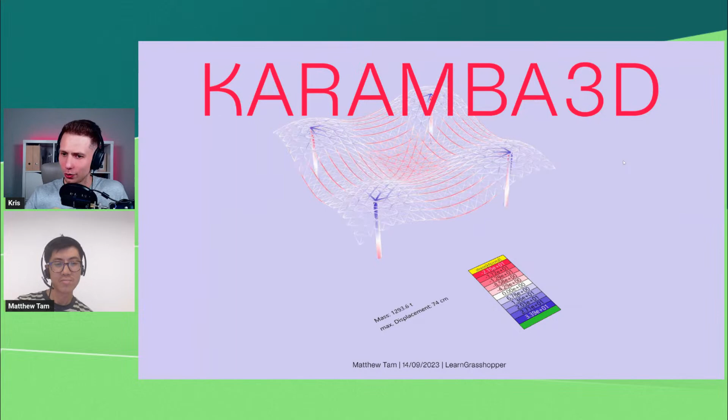Okay, we can see your screen now. Matthew, the floor is yours. I will follow the questions. So let's talk about Karamba 3D. Thank you. So I'll just start.

So basically today I'm going to be talking about Karamba3D. It was founded by Clemens around 10 years ago, and I've listed the current team members. We're approximately 7 to 8 people working half-time to full-time on the development of Karamba at different levels, from full stack and backend to a lot of the examples and learning materials that we share on our website.

Karamba3D has been developed as a collaboration between Bollinger and Grohmann, and it started as a research project at the Universität für angewandte Kunst Wien, the University of Applied Arts, Vienna, approximately 12 years ago, where the initial foundations were implemented. As Kris has already mentioned, my name is Matthew, and I'm a computational designer, also a trainer. My background is in architecture, but I've been in practice at the office of Bollinger and Grohmann for nearly 10 years.

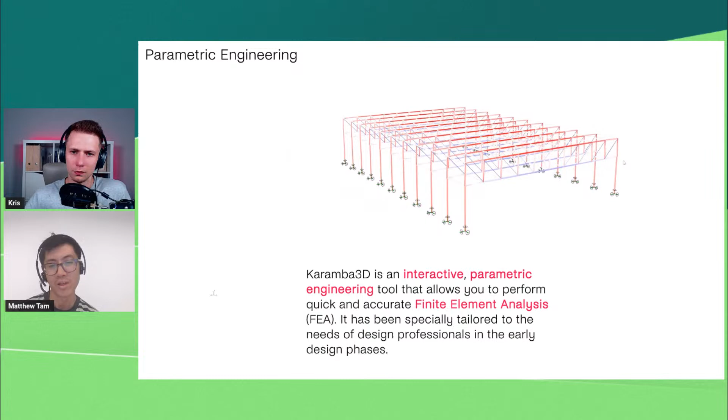So what is Karamba3D? Some of you have looked at it, some of you haven't. Basically, Karamba3D allows you to do what we call parametric engineering in the interface of Grasshopper. As you're aware, this is the platform for learning Grasshopper, so I'm not going to go too much into Grasshopper, but it allows you to do FEA directly in the interface of Grasshopper, allowing you to quickly analyze and get interactive results on your structures. So basically, you have your algorithm of calculation, and you can do everything in Grasshopper. So you don't need an external finite element analysis.

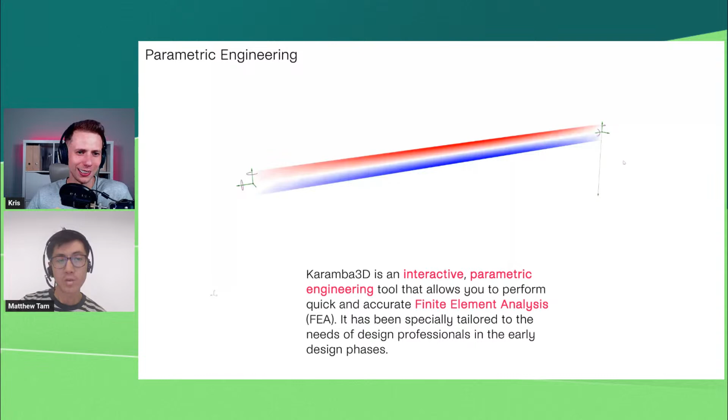I remember when I first used Karamba, maybe 5-6 years ago, it was only beam elements, but I think it was expanded since then, right? Yeah, so you can do beams and shells at the moment, and also trusses and membranes in Karamba. Good to see that you are also developing.

At the start, you showed the slide with the people who work on Karamba. How many of you are now at Karamba? I think we're 7 to 8 people, mostly half time. There are a couple who are a bit more, mostly based in Vienna, but also a couple remotely around the world. Great. So a small team.

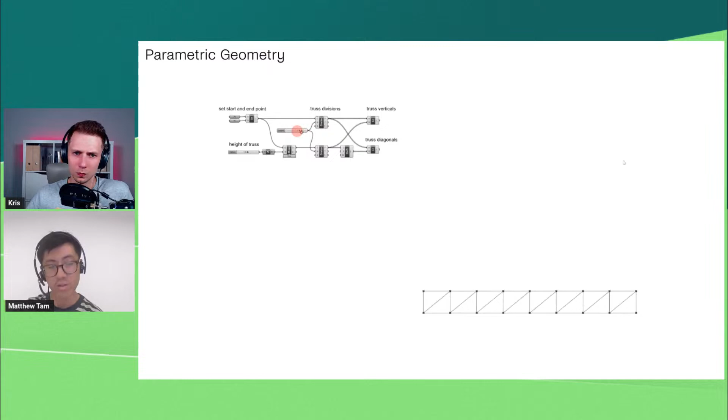Yeah, but growing. As it's embedded in Grasshopper, it allows you to couple your Grasshopper scripts with many other plugins in the Grasshopper environment, so you can do multi-objective optimization or other form-finding techniques in this interface. Just as a quick teaser on Grasshopper: how do you create a parametric geometric model? This is the most important thing that needs to be implemented first. Typically you might create this in Grasshopper, but Grasshopper also allows semi-parametric models where you model in Rhino, reference it into your Grasshopper scripts and then bring it into Karamba. Here's a couple of sliders that show how you can interact in a parametric environment with a truss, for example.

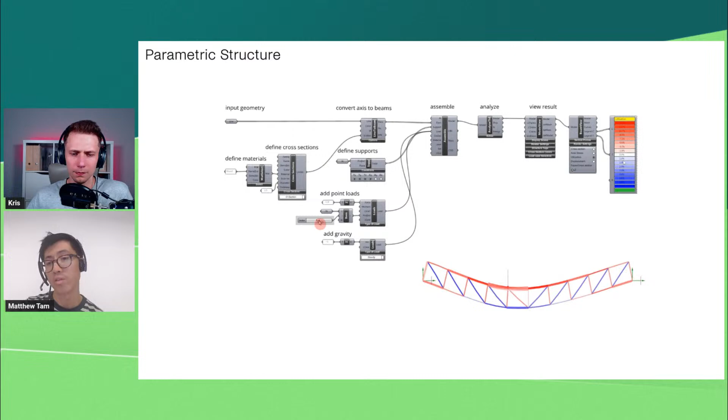Once we have a geometric model, in this case with lines, we can convert this into a Karamba model. This is basically a setup of beams or shells. We define the supports and we add loads. These are the minimum requirements to perform an analysis in Karamba. Once you have all these entities, you can assemble them, run an analysis to get live results, and then extract the results from the analysis.

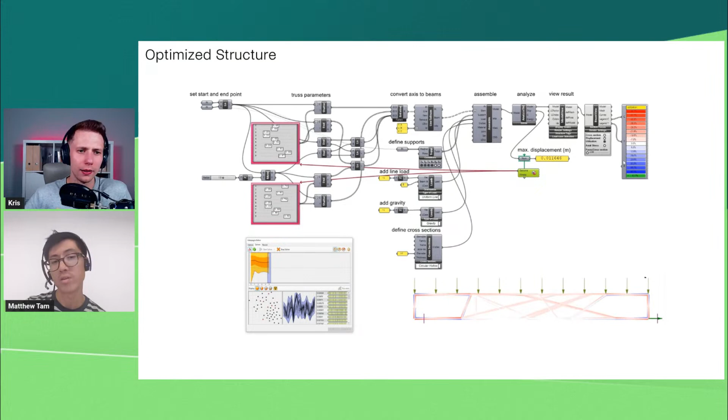And, like I mentioned, it's possible to couple this with different optimization techniques. In this case, we're using single objective optimization in Galapagos to optimize a random truss geometry and reduce the maximum displacement of our structure. These gene pools or sliders control the positions of these diagonals, as you can see, and over time we are able to find optimal designs for our structures. So this is an example of generative design, right? But you can connect other solvers? Yes, this is just one. You can connect Octopus, for example.

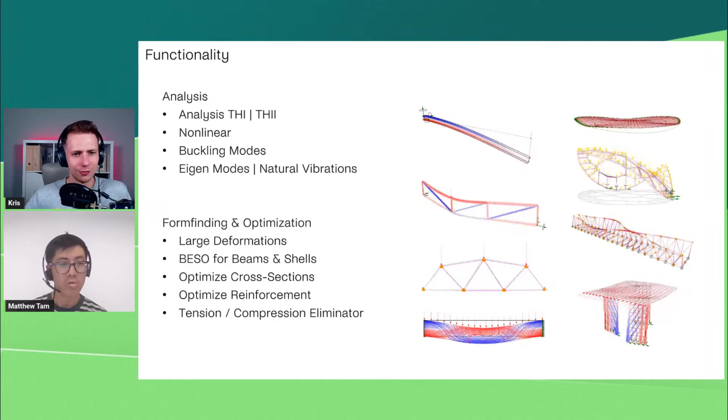Do you have a favorite optimization solver that you're using with Karamba, one you would recommend to everyone working on optimization? We were using Octopus a lot because it was developed by one of our colleagues, Robert Vierlinger. Now we're also looking at, for example, DSE from MIT, and also Wallacei as more interactive tools for multi-objective optimization. There are a lot of different tools, and if you want to go into machine learning, there are many others available. But currently we still stick to Octopus or Galapagos as the main ones. They're the easiest to use sometimes.

But there's a lot of other tools available. And I think it depends on what type of optimization technique you're trying to achieve as well. And I think you can also go into a whole session about optimization as well. Yeah. Maybe it will be the topic for the next webinar.

Yeah. And basically with the functionality, you can perform different analyses on your model. You can do form finding as well. And so here are just a couple of images from our website that show some of these different procedures in terms of, for example, optimization, the large deformation for form finding, then analysis in second and first order theory, as well as buckling modes and eigenmodes, which are essential to test and analyze the stability of your structures.

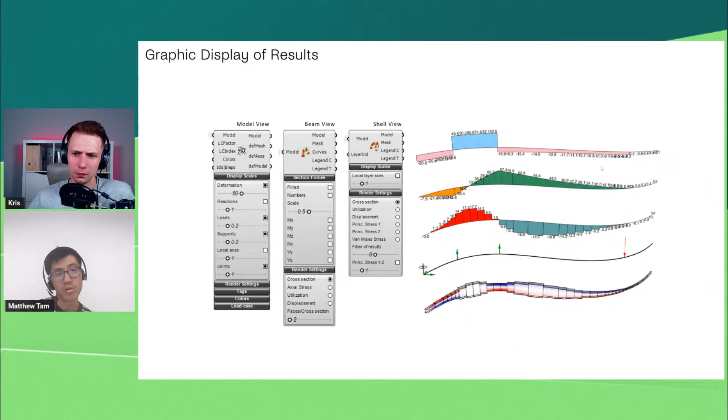Of course, it's very important to display the results. So there are a couple of different components which allow you to do this: the model view, the beam view, and the shell view, which you can display graphically. But of course, you also want to be able to extract numerically all these results, for example, as lists, so that you can match the beam forces with each individual beam at different positions on that specific beam as well.

So now you are showing all the components which are available from the Karamba3D toolbar, right? Yes, I think there's maybe a couple of new ones missing, but this is the range of different toolbars or different components that are available. Yeah.

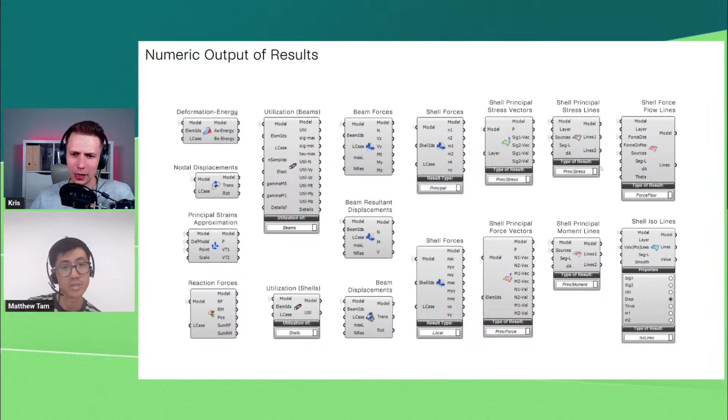And of course, one of the main drivers in the last few years is the idea of interoperability, and Karamba allows for many interfaces between different platforms. So Grasshopper itself has many methods of how you can import and export geometry. For example, run it inside Revit, where you can take the geometry from Revit, bring it into Grasshopper and create a Karamba model, or vice versa. You can take your Karamba model and bring it into Revit.

We've also been developing an interface for BHoM, which allows you to export your models into many other software platforms. And in the new developments, we're also looking at developing a SAF and a Speckle interface, which will be released with the new version of Karamba as well. Yeah, the Speckle release sounds really interesting. And this can actually open a new realm of possibilities, right? Because with Speckle, you can connect to any software.

But what about the BHoM connection right now? Is it developed already? Have you been testing it? The BHoM development has been working, so it is developed, but because each software environment has its own way of naming cross sections and generating, for example, loads and beams, there might be some small bugs in terms of the import into these softwares, but generally the export from Karamba into the BHoM interface works quite smoothly.

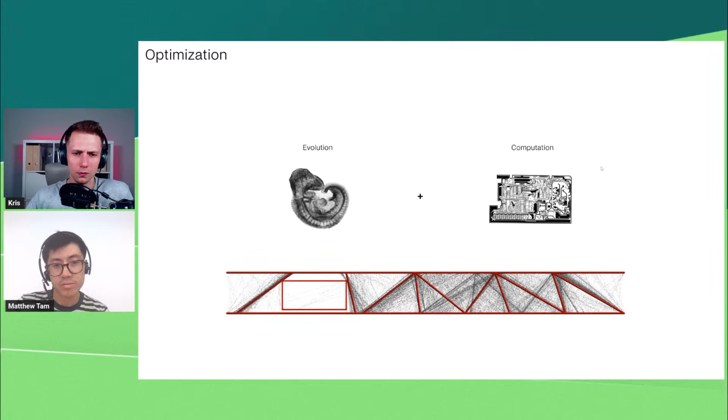So now I'm just going to show a bit about the basic setup for those who've never used Karamba. In essence, the model that's created in Karamba follows the same principles. Of course, there's much more complexity in terms of how you manage your list and data, but the basic setup is always going to be the same. So first, you always have to start off with a geometry. In this case, I'm creating some lines based off some reference points and using a couple of sliders to control the length of these lines.

Then we start to convert them into what we call Karamba entities, so elements. In this case, we're taking the lines and converting them into a beam element in Karamba. We can already specify what we call IDs or names for these elements. This is important, for example, when you want to retrieve the results for these elements, visualize the results, or do a cross-section optimization; it's very important to have these element IDs identified.

Next, we're able to set up the cross sections. In this case, I'm referencing an HEA I profile, the HEA 100 from the library of Karamba. You can also create your own cross sections. At the moment, we only support symmetrical cross sections, so I-beams, rectangular hollow sections, square hollow sections, solid trapezoidal or rectangular, as well as pipe sections.

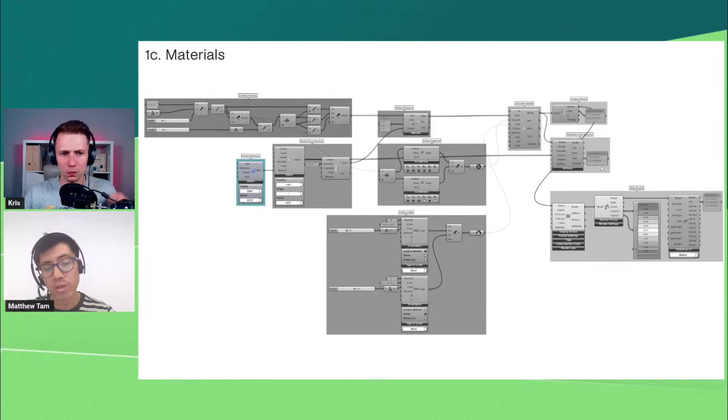And of course, it's also important to assign materials to these cross sections. In this case, we're taking standard steel. We have standard steel, concrete, and timber materials in Karamba, but you can also create your own materials by giving in the properties for isotropic or orthotropic materials.

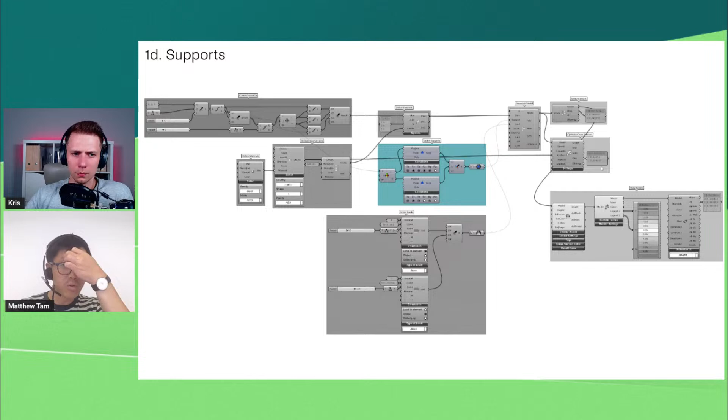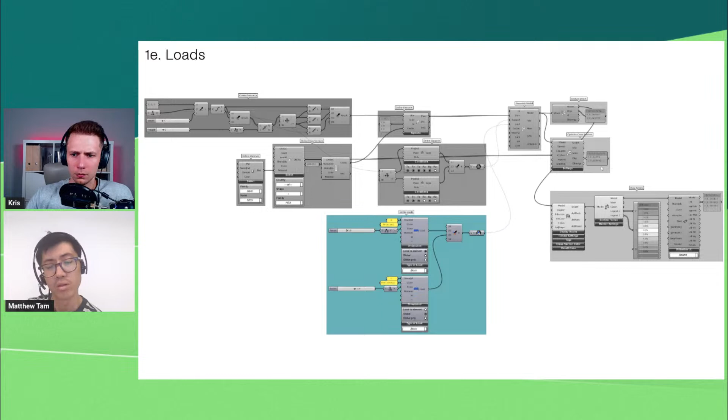Next, we define the support conditions. Taking points as an input, we basically define the degrees of freedom: if it's fixed, a roller, or pinned, and this is then assigned as a support for the model. And lastly, we need to define the loads. In this case, I've defined two uniformly distributed line loads, one on the vertical element in the load case vertical, and one on the horizontal element in the load case horizontal. So we can define multiple load cases.

And once you've defined all these entities, you have to collect them into one single model, using the assemble model component, as you can see here. Next, once you have the model...

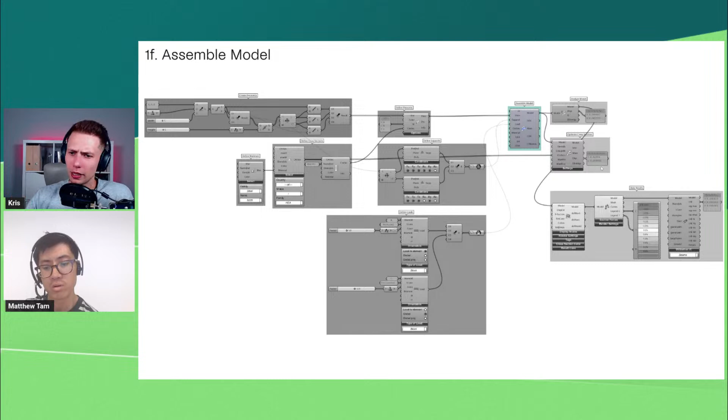Sorry to interrupt. Can we just come back to that one, because we have a question about the definition of seismic loads. Can you define seismic loads? Okay, at the moment this is something we're working on with the implementation of load combinations. Load combinations are going to be released in the new version, and with that we'll look in more detail into seismic loads. Currently, you could simulate a seismic load as a horizontal gravity load on a very simple basis, but we're working on implementing more detailed seismic analysis in a future version.

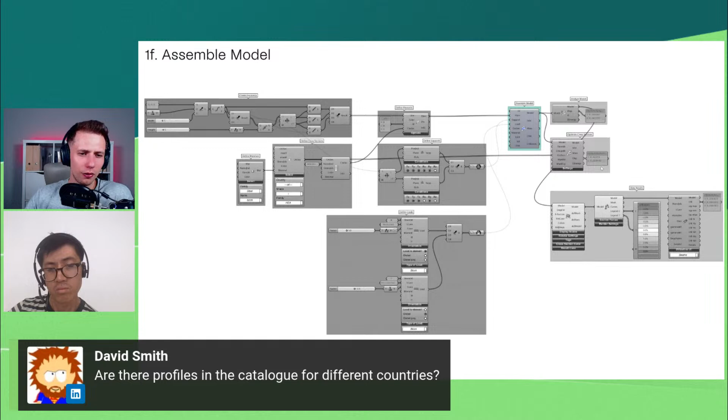We have also a question from David about the profiles and the catalogs. Can you also divide these profiles by the countries? Like, different countries are using different standard profiles? Yeah, so you can see, for example, the node has a country input there. So you can select per country.

Maybe you cannot zoom it. Let me see. It's a little bit... Do you have maybe bigger? Do you see it? Yes. Now we can see it.

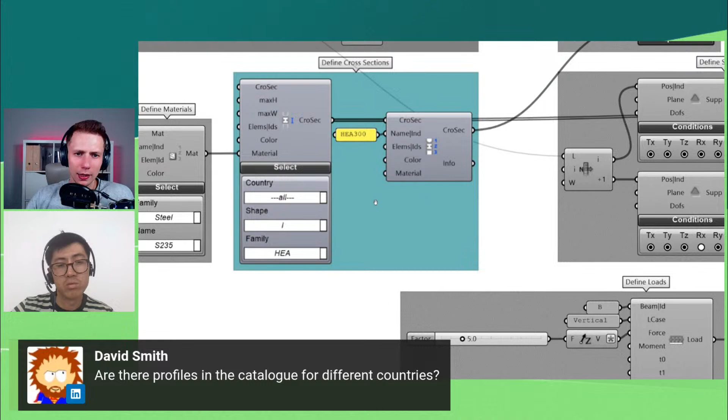Great. So you can define per country, shape, and family, for example. Oh, that's great. So this is about cross sections. Is it the same with, for example, loads? If you define some standard loads from different countries? No, loads are totally independent. Basically, you can define the loads however you want.

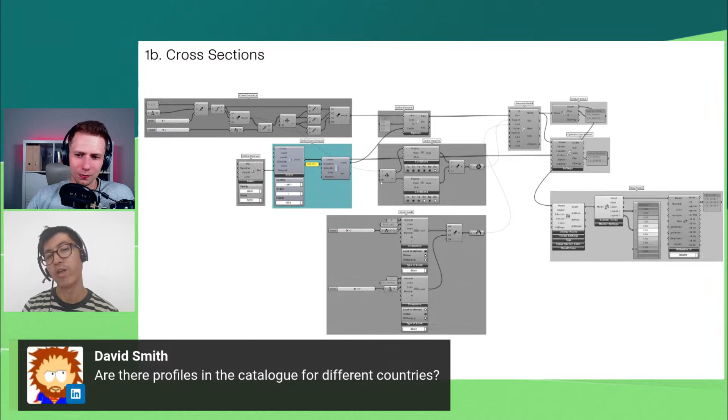So there's no standard way of defining, because although most countries probably work very similar in terms of code, each country is somewhat different, and it's very hard for different geometries. It's not always a preset way. So we provide more flexibility in terms of defining loads in this case. Okay. Great. Thanks.

So once you have your model assembled, we then run different types of algorithms. In this case, for example, I can analyze it with all cross-section sizes to be the HEA 300 size, and then we get the results for the maximum displacement for each load case. In this case, I have two load cases, so we get two outputs for the results.

Alternatively, we could also perform an optimization of the cross sections. So in this case, I'm allowing Karamba to give us the cross section sizes for this setup of our model with the loads and the support conditions that have been defined, picking from the entire HEA catalog of profiles. And this would then also give us an output in terms of displacements for those load cases.

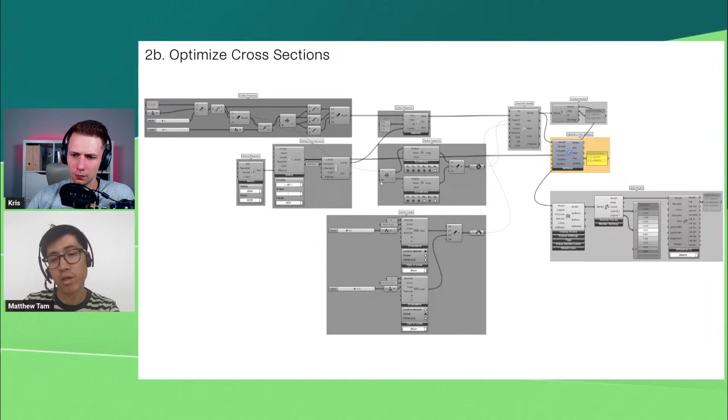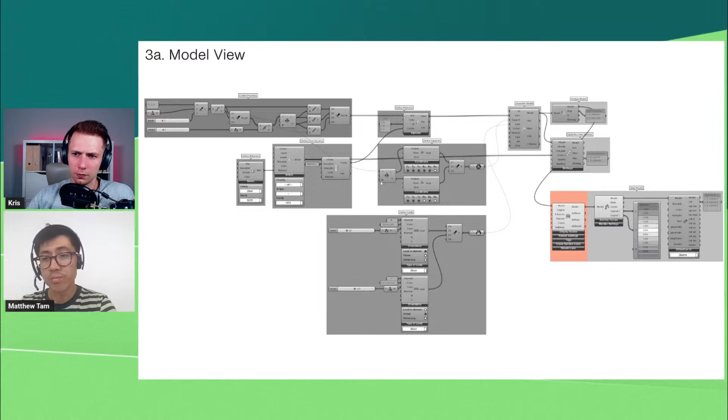And lastly, once you have analyzed or optimized your model, then you want to, of course, visualize it. So first is to look at the model, where you can, for example, look at the supports, how it deforms, and how the model is set up in terms of its loading as well. Next, we can also look at the beam view, extract results in terms of section forces, render out, for example, the displacements and the utilization of our model.

And lastly, if you want to also extract numerical results, you can use the specific components. In this case, I'm using a utilization component to extract utilization according to Eurocode 3 for these three beam members.

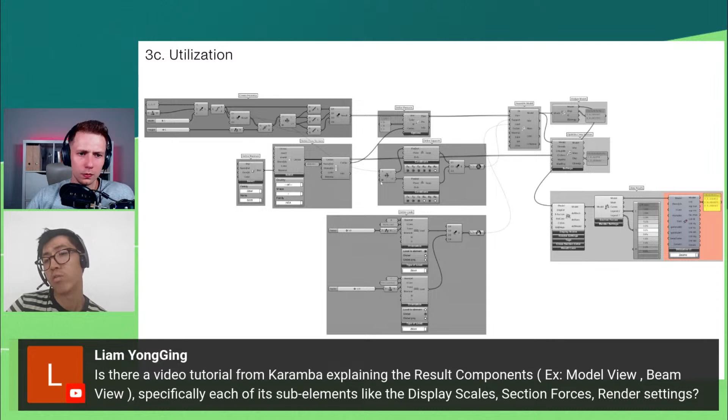About visualization, actually, there's a question from Liam. Is there any Karamba tutorial explaining these topics about display scales, section forces, render settings? Yes, we have many. We have many free videos on our website that you can go to to learn a bit more about these specific workflows if you're interested. I'll be also showing later in the live demo how this works.

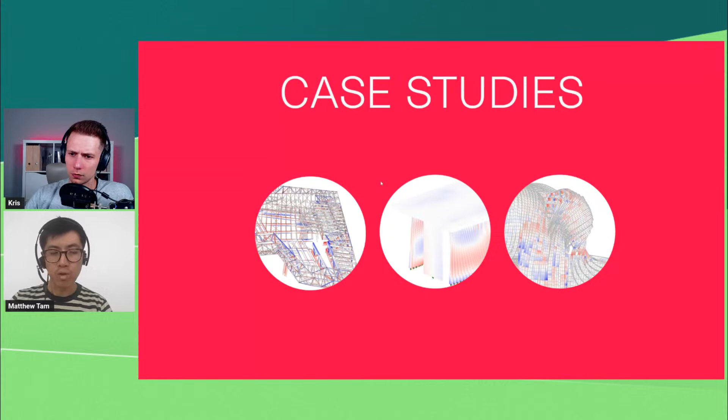So now just to jump on a couple of case studies to show how Karamba has been used in different projects at different scales as well. So the first one is one of the first projects where we implemented Karamba in a large scale project at the office of Bollinger Grohmann. This was a competition that the architects, Delugan Meissl Associated Architects, won, I think, in the early 2010s.

And so they designed a sort of floating roof in the sky, where on the ground level it would be the exhibition and retail center for Hyundai, and in what we call the programmed roof, there would be other functions such as event spaces, multifunctional halls and offices for the staff and also for the users.

So one of the challenges was how can we create a very open and expansive space on the ground floor. So one of the main tasks for us was to work out how we can minimize the impact of the columns on the ground floor. What was in a way fixed were the core positions. These were important for the overall vertical circulation, but also for the global stability of the entire structure. And then in terms of the column positions, we were quite flexible.

So rather than having a standard grid, which would actually render the entire space unusable for the car exhibition, we opted for an option to cluster columns in groups, which in itself would also give more lateral stability, but also allow us to have a bit more flexibility in the plan of the structure.

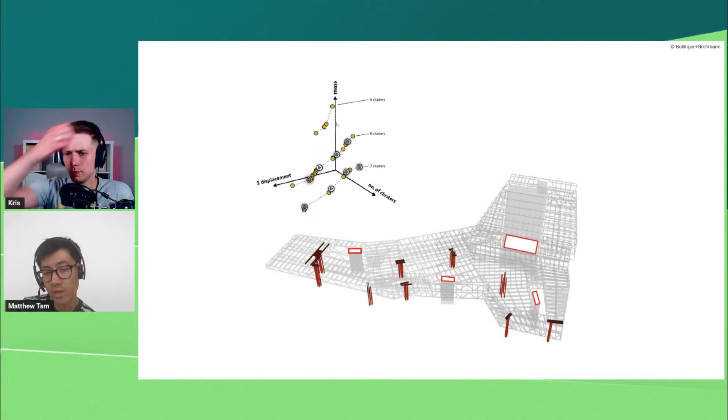And then we set up a multi-objective optimization to look at three primary objectives. One was reducing the total mass of the roof. One was to reduce the number of clusters in total. And the other one was to reduce the displacement.

And often with multi-objective optimization, we have different objectives which are contradictory to each other. So often, when you want to reduce the displacement, you have to increase the mass. And this might also increase the number of clusters of columns. But of course, we want to reduce the number of clusters so that we reduce the cost and the mass of the structure. So often these are not really all in alignment.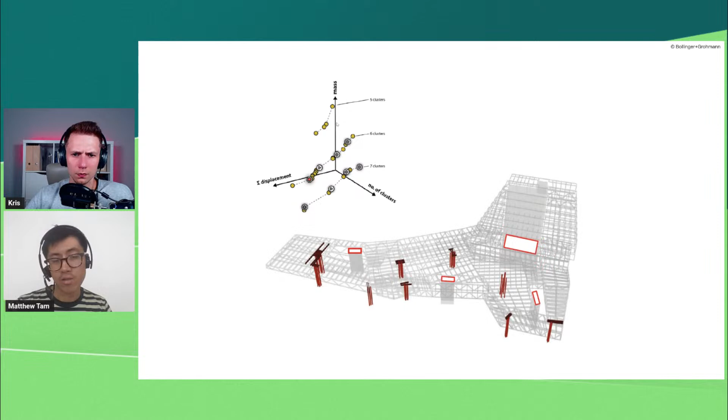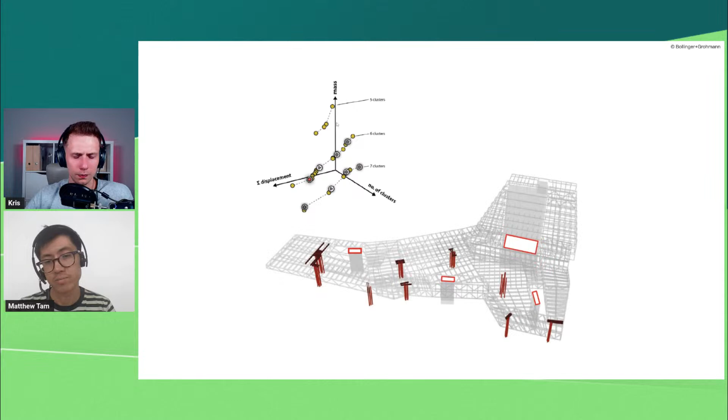So we then have to study what we call the Pareto front of the results, evaluating which trade-offs we're willing to work with after we have performed the optimization process. So after this optimization process, we came up with this scheme together with the architects, which was then optimized totally in Karamba.

So here you can see an image of the entire structure. At some points it becomes a totally spatial framework with full ceiling height trusses, and at some points it becomes more of a small, lightweight single roof structure. And we have different orientations in the roof structure and the trusses that create this programmed roof. So it was a very complex exercise to do manually. That's why it was key to set it up in a parametric way that allowed us to control the position of the columns, but also how that then dictated the layout of our trusses.

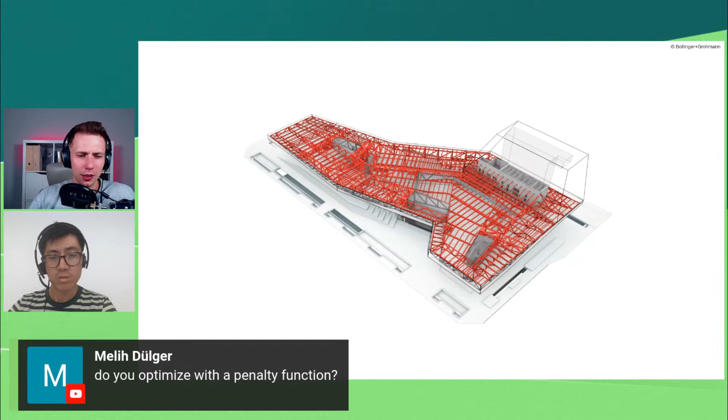Here you can see the image. Sorry for interrupting, a question about the optimization: have you used a penalty function for optimization? Oh, this I can't remember anymore. I think there probably was, because this is something you often might want, a hard no or yes that allows you to sometimes make the process quicker. But I can't remember if this was implemented. Maybe there was a case that allowed us to check if the column was inside or outside a specific boundary condition, but I'm not 100% sure anymore of the exact optimization procedure.

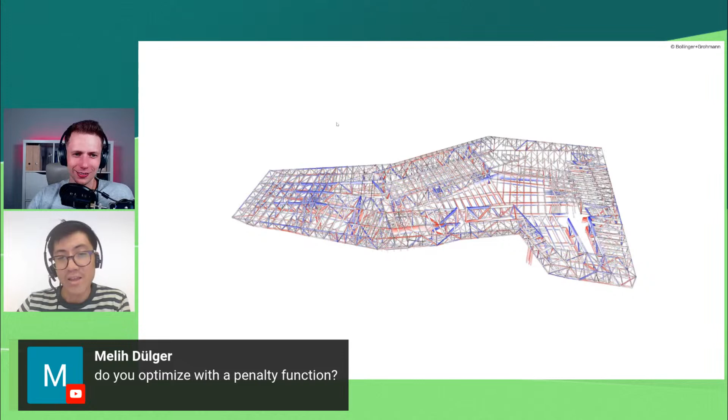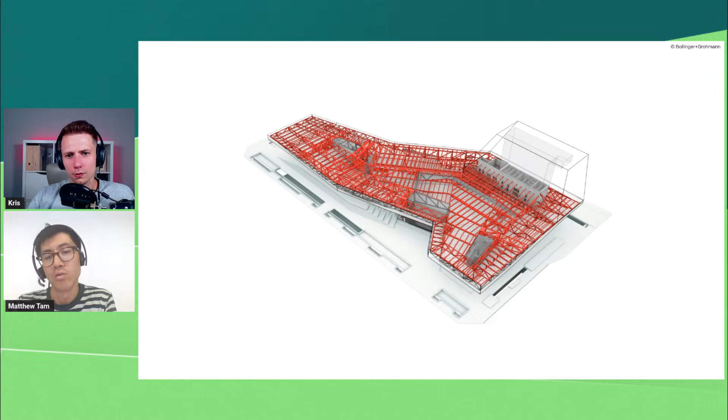The next project was a small project that the engineers and architects of Nikken Sekkei developed, approximately 10 years ago, 2012, 2013, to create an optimization to design the shear wall of this office building.

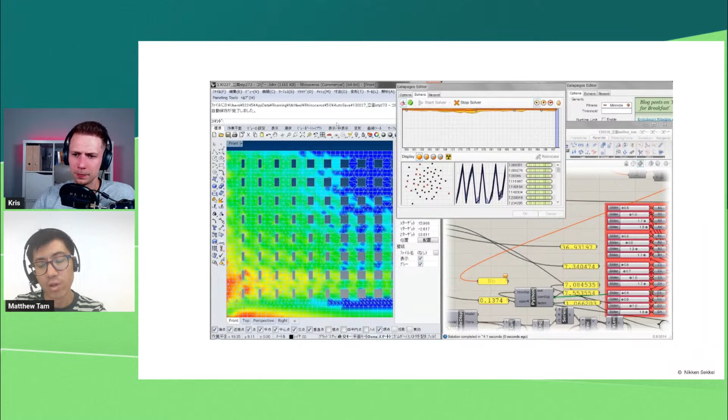As we all know, Japan is prone to seismic activity, so they developed a quick script to analyze the performance of the shear wall, coupled with Karamba, to look at the opening sizes and optimize their position and sizing. So they had a script that allowed them to set the width, and I think also the height, which was directly coupled with Karamba, allowing them to analyze and interpret how this shear wall was behaving.

Here you can see a 3D model of the structural model that they created in Karamba that they used to analyze. And then of course they brought it into their own software where they would do further analysis for the design, for the development of the structure, as well as for execution of the structure. So Karamba is often used as a tool in the early design phases, where you can really study how different changes or different design ideas might influence the entire structural behavior of your buildings.

So actually, this case study that you showed is the answer for one question: does it work for meshes or maybe only for frame elements? No, this is also Karamba, meshes. Yes, this is a mesh, basically like a wall element here.

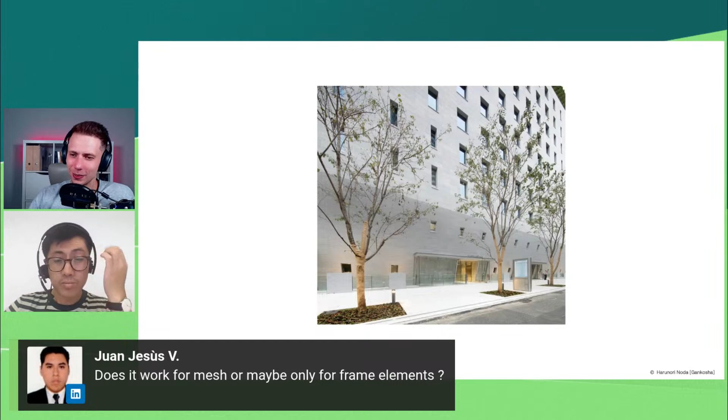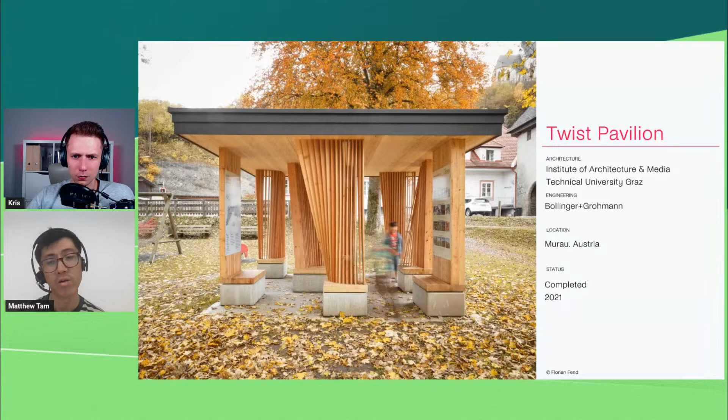Correct. And the last project that I wanted to show was a fun little project that we did with the Technical University of Graz, engineered by Bollinger+Grohmann. It started off as a university project with the master's students of architecture. The client came to the university and said they wanted to develop these pavilions where they could showcase the local timber industry, but also showcase the different hiking routes in the area of this alpine region in Austria. So the main idea behind this pavilion was to have these twisted, very, very thin lamellas, which start to create structural stability due to their twisting angle.

So we did some early initial studies, for example, on site, by twisting these lamellas. If you just have a flat or vertical one and you put a load on top, it tends to buckle very easily. But by twisting it at approximately 30 degrees, which we studied in some Karamba models, we are able to increase the buckling load of the element itself, so basically increase the stability. So this was forming the main structural typology of this pavilion.

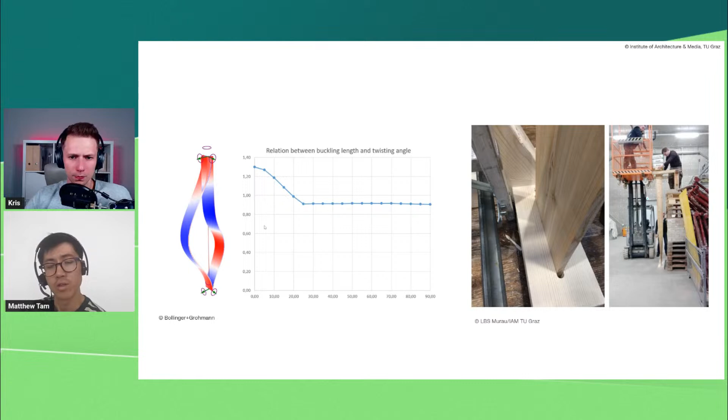And then this was brought into the design of 3 different typologies, each fitting a different location and site constraint. But the typology of each of them is the same, where we have these twisted timber slats. They're 14 millimeters thick, so really, really thin, and approximately 3 meters in height.

Then there are CLT panels on the top and the bottom, which are CNC'd, and these lamellas are slotted in from the top and also slotted down at the bottom in this base plate. There's a concrete base where these elements are fixed to, and everything was prefabricated offsite and brought in 1 or 2 pieces onto the site.

And speaking about the concrete, we have some questions from Anders. Is there any workflow? Can Karamba be used for reinforced concrete, for example, placement of rebars or something like that? Yes, there's an optimization process for the reinforcement of concrete shells, for example, that you can look at, and we'll be releasing some more videos on that in the near future, on how you can do more detailed optimization of concrete structures. So it is definitely possible to work in concrete too.

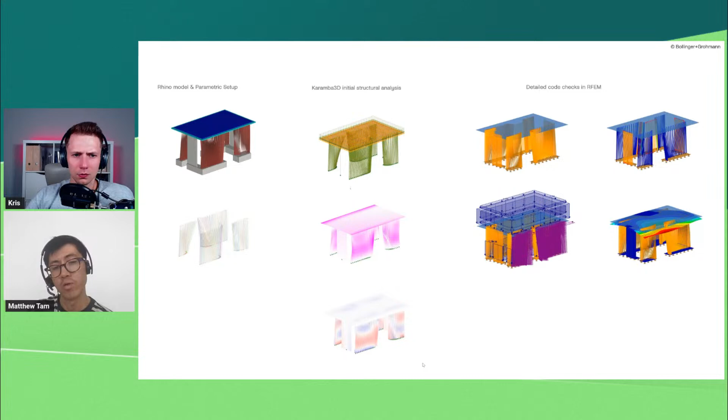Yeah. Oh, sorry, I think that was the last stage. And I forgot to mention that in this case we also added these vertical walls, which were also used for the horizontal stability of the entire structure. So they were not only used for showing the local hiking routes, but we also used them as structural elements, because they were something that was required from the client. So we managed to integrate them, and they were important for the entire structural system as well. Really interesting case study, and actually there were 3 of them. It was really interesting.

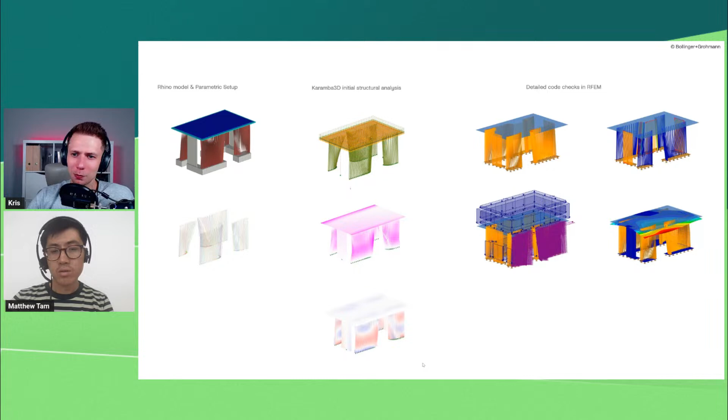For me, this twist pavilion. It's really cool, maybe the smallest in scale, but the idea behind it is really amazing. It's maybe more architecture than structural analysis here. That's why maybe it's more sexy.

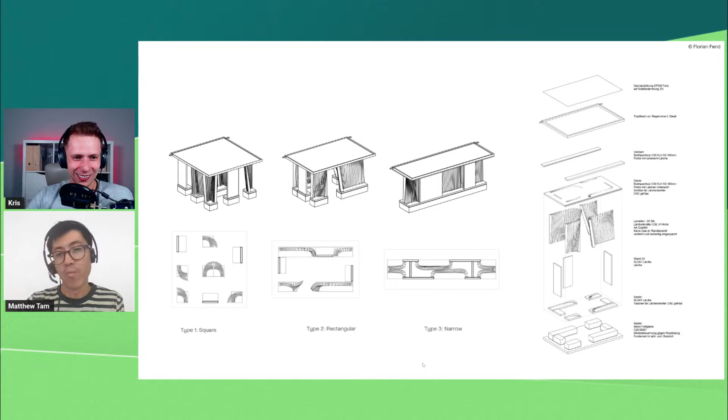And great presentation, great renders and load cases. I saw on your website you have hundreds of examples of projects from the whole world, as you showed, from Japan, Australia, to the whole of Europe. So that's really cool.

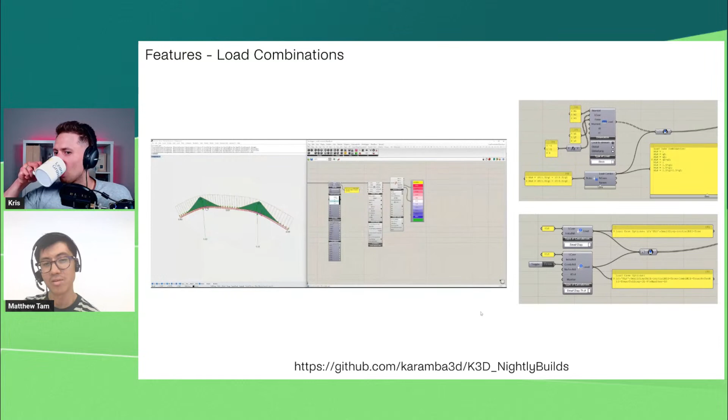Okay, so now you would like to show us what is coming in Karamba3D 3.0. Yes, so just a little teaser on what's coming in the next version. As I mentioned, load combination is something that we're currently working on. So here is a quick preview of how to implement load combinations, and also the possibility to analyze structures and optimize on load combinations or specific load cases as well. And we'll hopefully be releasing more information about that in the future.

The API interface, if you're interested, you can also find information on our GitHub page. There's also the possibility to use Karamba outside of the Grasshopper environment in C# or in Python, for example using Visual Studio. You can find more information on our GitHub page with this link as well.

Yeah, so you can even expand it more, right? If you are missing some possibilities, you can access the API if you know a little bit of C# or Python. Is it available in both languages? Yes, if you just want to do it natively in code, then you can use both languages. But if you're working in Grasshopper itself, you can also create your own custom components using our API in C#.

Okay, we have more questions, but Matthew, maybe you can present some of the live examples. I'll just show the live examples. Yeah, go live, so we can maybe test it. Can you all see my screen now? Yes, we can see it right now. Maybe I can make it a little bit bigger.

Okay, so this is just an example. I think Kris will also be sharing this, but you can also find it on our website, where you can create a simple portal frame, right? So here we have just created some elements.

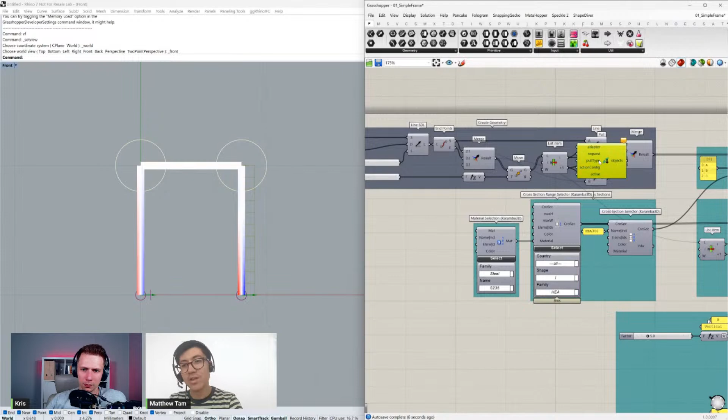Basically, the width of our frame can be controlled by this slider, and the height can be controlled by this slider. At the moment, they're brought into one list where I basically label each element with A, B, and C. We're defining a cross section for all of the elements, and in this case, all of these elements have the cross section HEA 300.

Of course, if we wanted to, we can change the cross section by selecting and changing a name here, or if you want to change the family, you can also do that by selecting a different family. Someone asked about the countries. You can also select from a different country range, or you can select a different shape, for example, and use that to assign your cross sections.

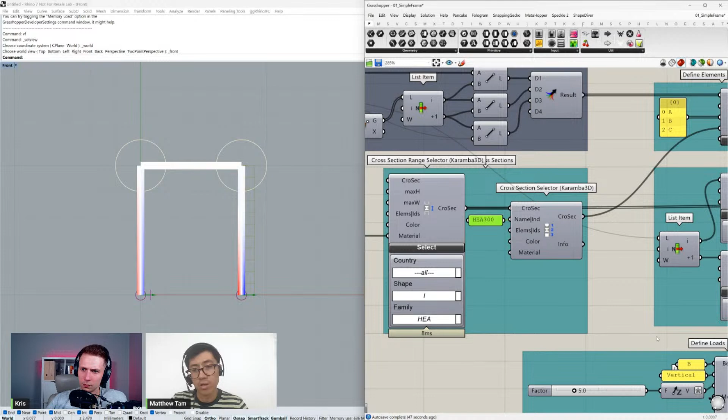In this case, we're taking the entire library, in this case 24, and I'm selecting one of these as my cross section for the initial analysis, because this is what's important when you do an optimization. You need a starting cross section. So I want to compare the results of the optimization with the analysis where I selected HEA 300.

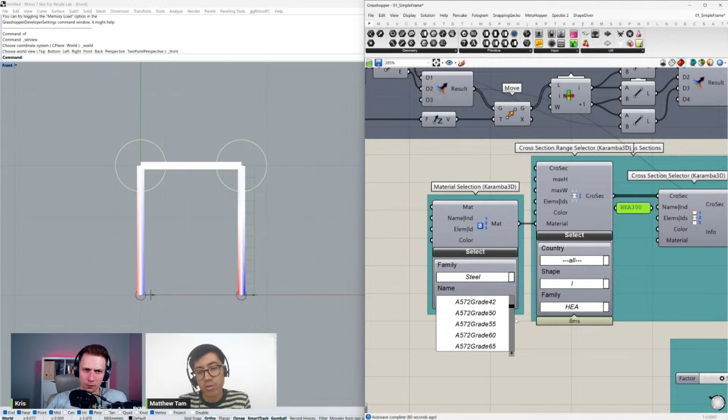Here we're able to assign materials. So here you can also select from different types of materials, for example, from the list, family, and the grades of those materials as well. And there are grades for many different countries found here.

Next, as I mentioned, it's important to define the supports. If I now turn this on, you can see our supports are defined at the bottoms of our frame. One of our supports has the Z rotational axis released, and the other one is released in RX, rotation in X, and RZ. By clicking on these, you can deactivate or activate specific constraints in your rotation, and you can see that updating live in our model.

For our loads, I've created 2 load cases, one for vertical, applying 5 kilonewtons per meter as a line load on the entire element. In this case, it's local to the element. So we have to know which is the Z direction of our element, so that we apply a force of 5 kilonewtons per meter in the Z direction of the beam.

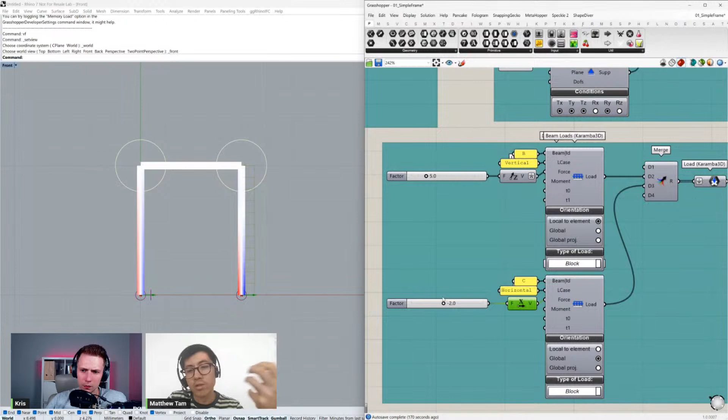If we set it to global, you'll see here that if I change it to global or local, the orientation of our load will change, because the direction of Z is different when we set it to global or local to the element. If you can just come back to the support, we have... Yes?

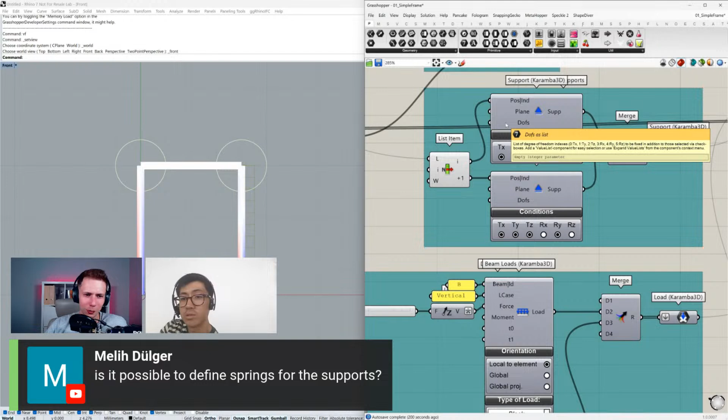2 questions. Can we define the stiffness? No, at the moment, if you want to define stiffness, you can add a spring element between your elements and your support to define a specific stiffness as a support. Yeah, so actually you answered 2 questions, because the second was about the springs. Okay. There are examples on our website or in the installer that comes with Karamba that help you understand how you can do springs, for example.

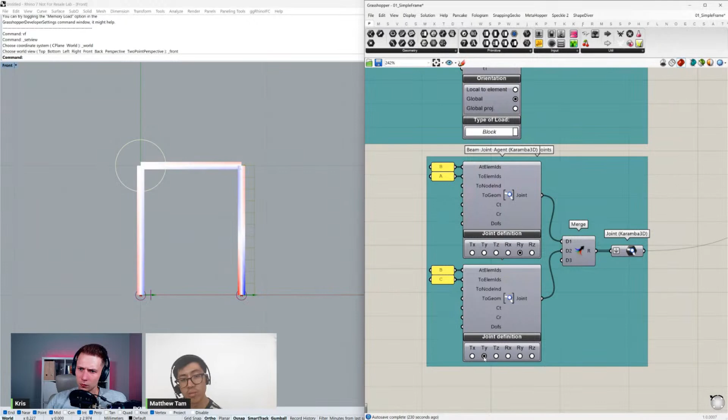Lastly, I just wanted to show how we use the beam joint agent to define joints between elements. In this case, I'm releasing the Y rotation of the connection between A and B. And I can also release, for example, TY, TX, or TZ in a specific direction at another joint as well if I wanted to. So that's how we can work with joints.

All this information is collected in the assemble model, and this is what we need to run any analysis or optimizations of our model. So the first step is running the analysis of the model with the HEA 300 profiles. We get displacements for each load case, 0.2 centimeters, and 0.05 centimeters for the second load case.

I'm going to talk about the optimization later, but here you can see that the model can be visualized using the model view component. If I open this, we can, for example, look at the deformations of our model by activating the slider. You can look at the reaction forces. For example, you can increase or decrease the slider here.

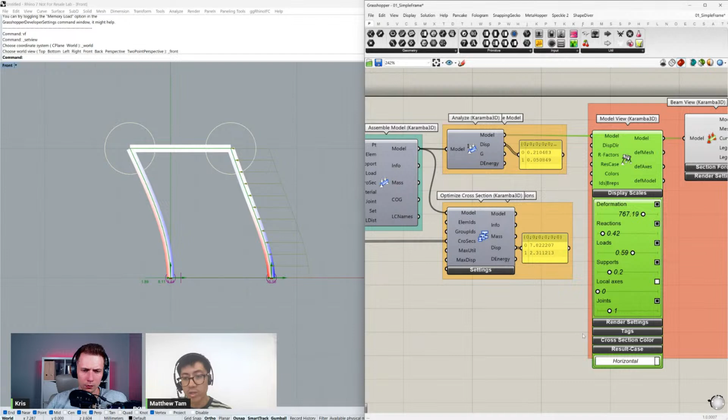And often this is, for example, very small shown here. You can visualize the loads, which I've already visualized, or you can turn it off or on. In this case, I'm visualizing the horizontal load case, but of course we can have a look at the vertical load case too, which is like this.

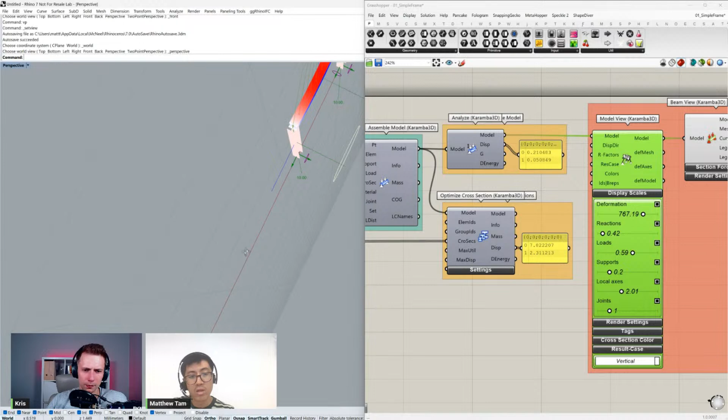And here I can also turn on my local axis of the beam if I want to see it, and now I have to actually go into 3D to see this because the local axes are shown in 3D. Let me just hide the beam view first so we see the elements. The local axis refers to the X direction of the beam, which is always in the axis of the beam, the Y, which is the green, and then the Z, which is the blue.

A quick tip is to remember RGB, X, Y, Z. So red, green, blue. That's smart. Yeah, so RGB.

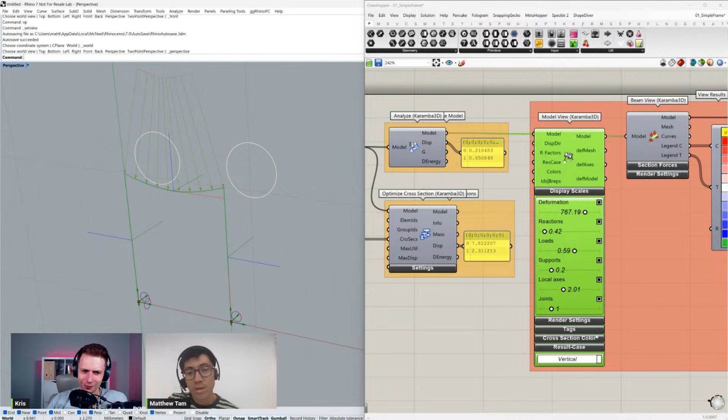And then if I turn on my beam view, there's also opportunities. For example, sorry, I looked at the tags. So you can also look at the element tags, which show you the list of these elements in numerical order. We can look at the element IDs, for example, A, B, C. We can look at the cross-section names. They were all assigned HEA300s. We can look at the material names and loads.

Can we also change the scale of the text, so that it will be bigger? You can change it in the ini settings, for example, and there's a video on that if you wanted to look into changing the scale. Of course, in this case, I have a very high resolution screen, so it's showing the numbers a bit smaller.

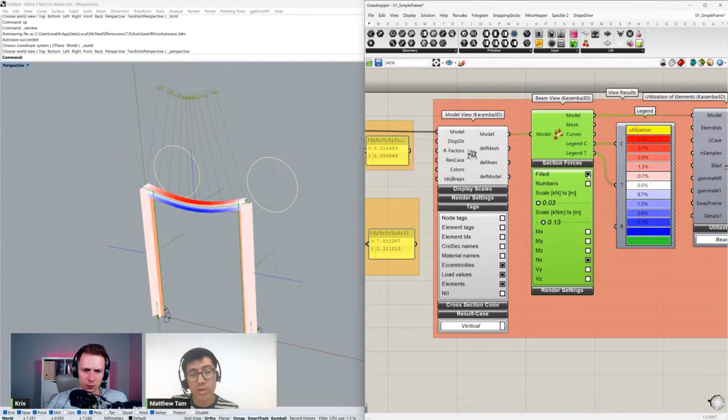Yeah, so then we can look, for example, into the beam view. If we want to look at the normal forces, you can turn on the normal forces and also render the meshes with the numerical values of our normal forces. So here you can see, in this case, we have compression in both our vertical elements in the vertical load case, and then horizontal, we have compression in the top beam.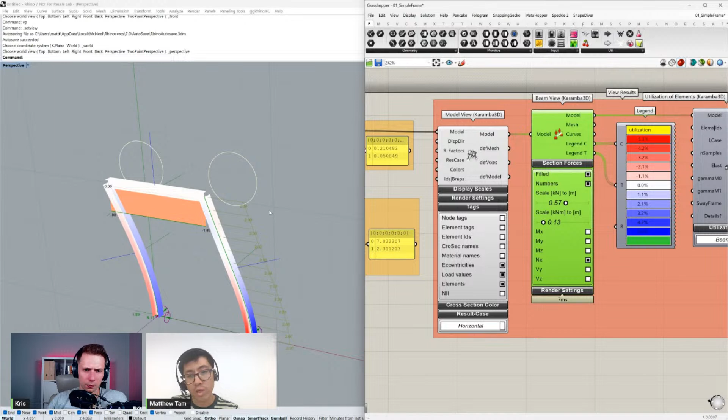We can also look at the bending moments, where these might be, and if we then go in now and remove the release, then you can see that it becomes basically a moment frame as well. So moments are also then carried between the different frame elements too. So you can really see how the structural system changes as we release or add joints to our system.

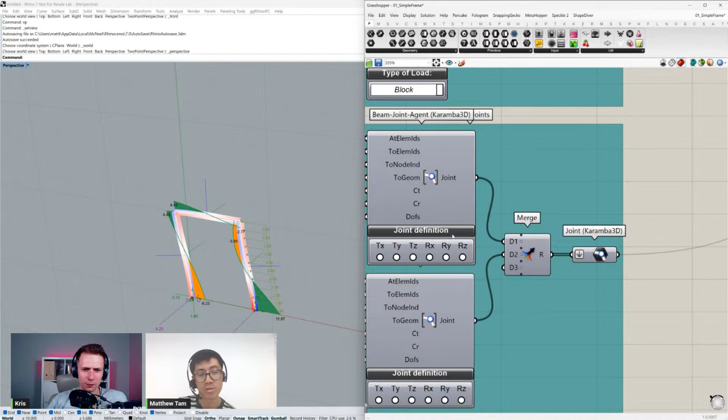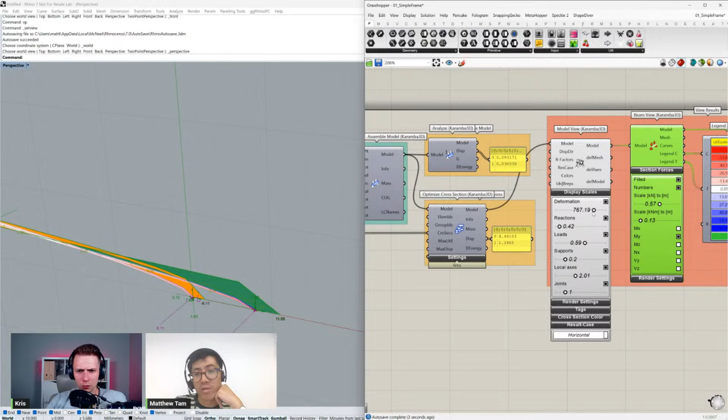And what I wanted to show lastly is this optimization procedure where we take this model, we take the starting cross section, and we apply a list of different cross sections for Karamba to choose from. When we do so, the optimization process has given us a larger displacement. In this case, it's actually optimized for smaller cross sections because this fulfills the 100% utilization that we need to achieve, but the displacement is higher with a smaller cross section.

Because the main objective is to optimize for utilization, but we're also able to optimize for displacement. If you put in a numerical number, for example 2, then it will optimize for maximum 2 centimeters for all load cases. In the future release, we're going to have the opportunity for you to optimize displacements and utilizations for specific load cases or load combinations as well.

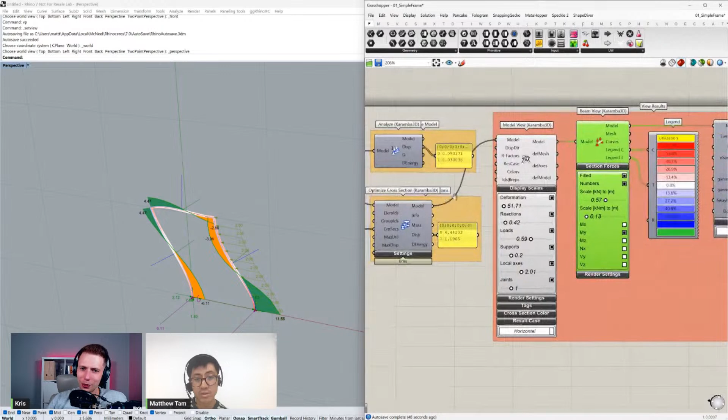And this is, in my opinion, the biggest superpower of Karamba over other software. You can calculate your forces, and every single structural analysis software can do that, but this optimization is pure gold. Yeah, so this is one of our main tools that a lot of people like to use to give a very quick idea of how the cross sections should be pre-designed for a specific scenario.

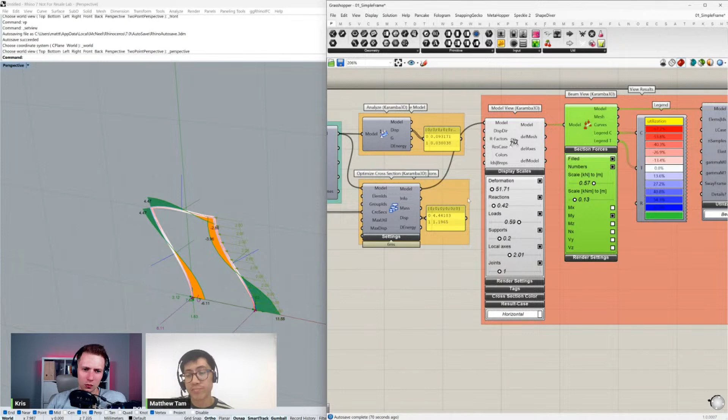I'll just jump onto the last example quickly, which is a much more complicated one, but just to show a more structured way of how you create a setup. In this case, I'm creating a footbridge here, which is located in Vienna. It's basically designed by the office of Otto Wagner.

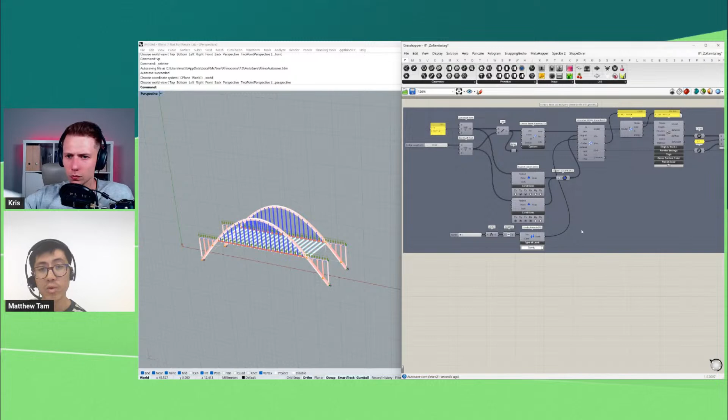And basically, in this case, what we're doing is taking a simple line and running a simple analysis of this line by using supports at both ends. One is a roller, and the other one is a pin support, and simply applying gravity.

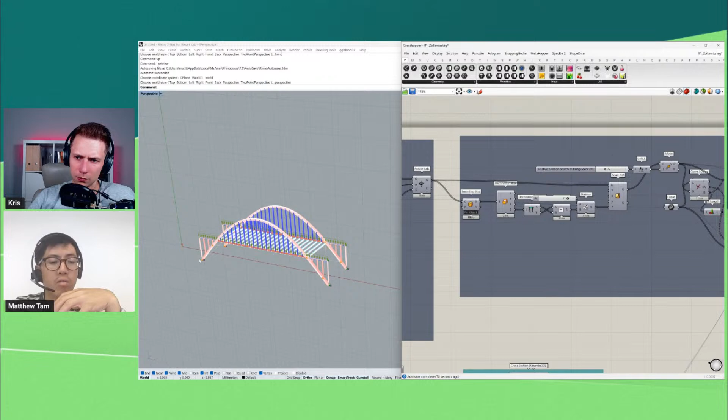And then we're extracting the deformed shape, which is this one here, and using that as the actual geometry for the bridge arch. So then just using some components in Grasshopper, we're then reversing it and moving it so that we are able to create this inverted sort of hanging shape that was resulting from the deformed beam. And then we start to use these to add the verticals and the horizontal sort of struts for the bridge design, which you can go through in a bit more detail on how this is set up.

I'm not going to talk about the geometric setup of this. But basically, what is then done is we collect all of those elements into one list with multiple branches. And this is one of the most powerful things of Grasshopper and how data is arranged in Grasshopper as well as in Karamba. So here, for example, we can use one component to contain all of our elements, but have levels of control of all these separate elements as well.

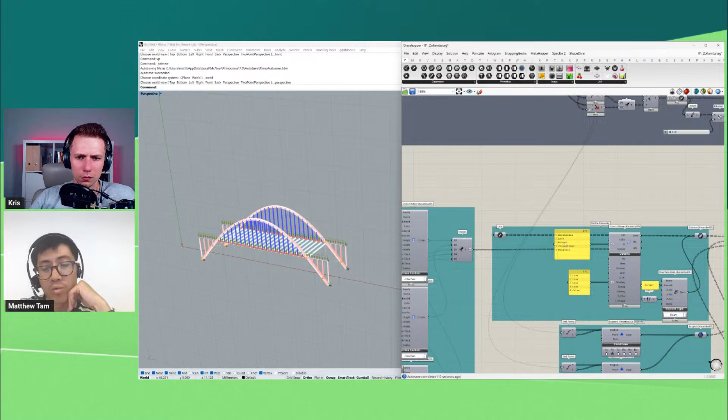So in this case, I have 5 different typologies identified in one list, but by using different branch structures or data structures, we can control, for example, the naming and typology of each of our branches. For example, horizontal, arch, hanger, cross girder, diagonal, by grafting the inputs so each of your path structures match. And then the same follows with cross sections as well as materials.

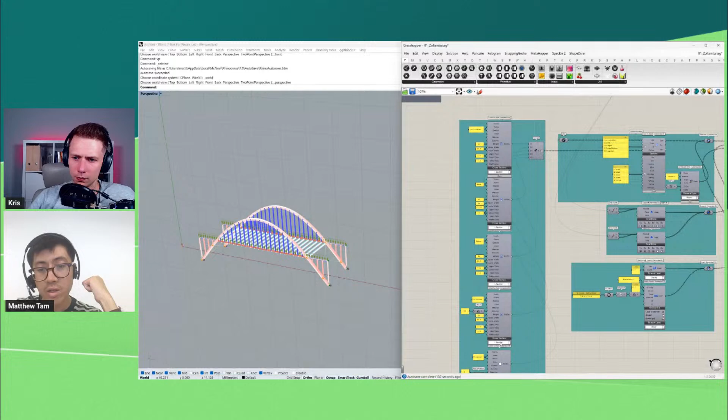So cross sections, we here have defined 5 different types of cross sections, 4 of them I profiles, and 1 of them circular profiles. And these are all unique ones that we defined ourselves. And we've assigned them also in a single list, which we've also grafted for each individual branch. With this, we're also able to convert these elements into trusses or beams by setting bending off and on by using this same typology by using true or false.

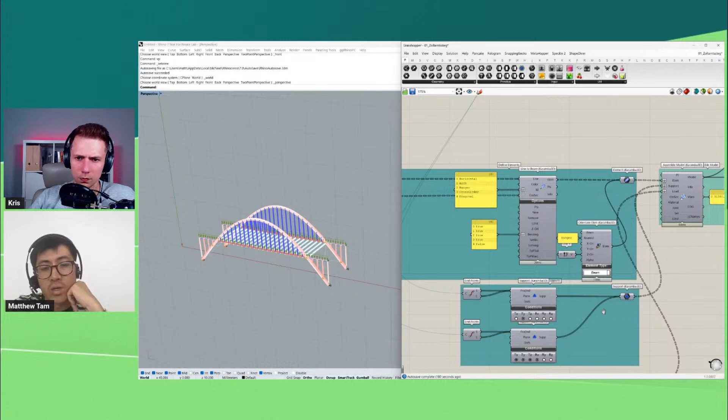And then in this case, we're also using the orientate element to basically rotate the specific elements in our structure. In this case, these vertical hangers. I'm using this here to define our support conditions. So having a roller support and then a pin support at one and the other side. And then for our loads, we have gravity in one load case, and we have in the second load case a sort of line load on these beams there.

So Karamba is not just about buildings; it's about also bridges, right? Yes, so you can do buildings, you can do bridges. Also, some people are looking into, for example, furniture design, industrial design, and more sort of smaller objects as well. So there's multiple scales at which you can look and use Karamba.

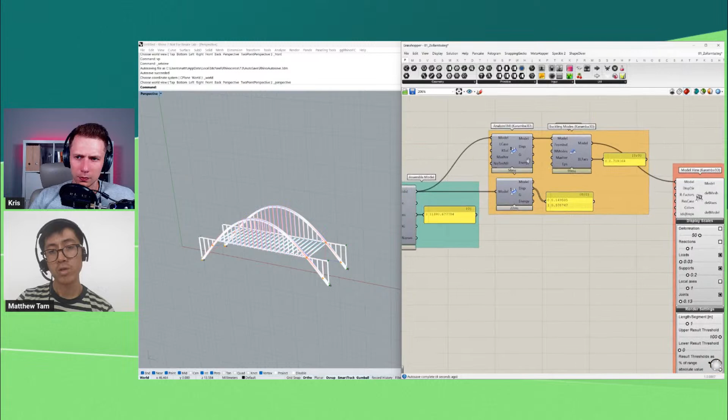So all of this is then brought into this assemble model. Once again, we get information about the total mass of our structure, and we run the analysis and get the results of the analysis. In this case, maybe you're interested to know how the buckling of this works. And so here, in this case, I have the first buckling mode of this bridge, and I can visualize the first buckling mode by turning on the deformation.

And so we can also add more buckling modes for the analysis, and we can also visualize the different buckling modes and see how the structure might buckle at some point as well. If it's local or if it's global, if you have local buckling issues, for example, in a specific column or in a specific beam, it's quite easy to see where this might happen with this component as well.

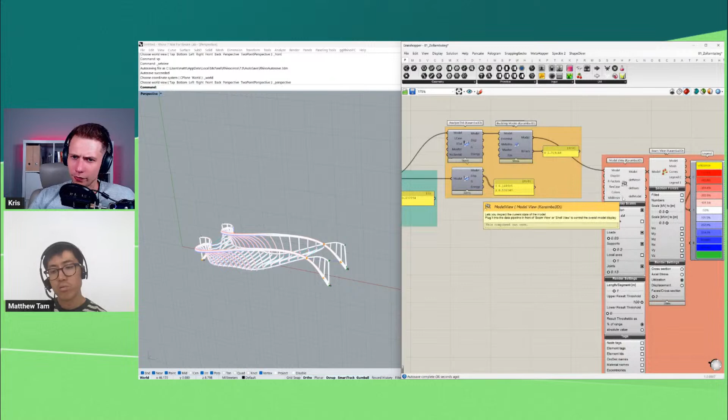So that was a quick sort of preview into Karamba, and I think these examples will be quite fun for everyone to sort of play around with themselves. And I just would like to, if there's a couple more minutes for questions and stuff, I'll be glad to answer these.